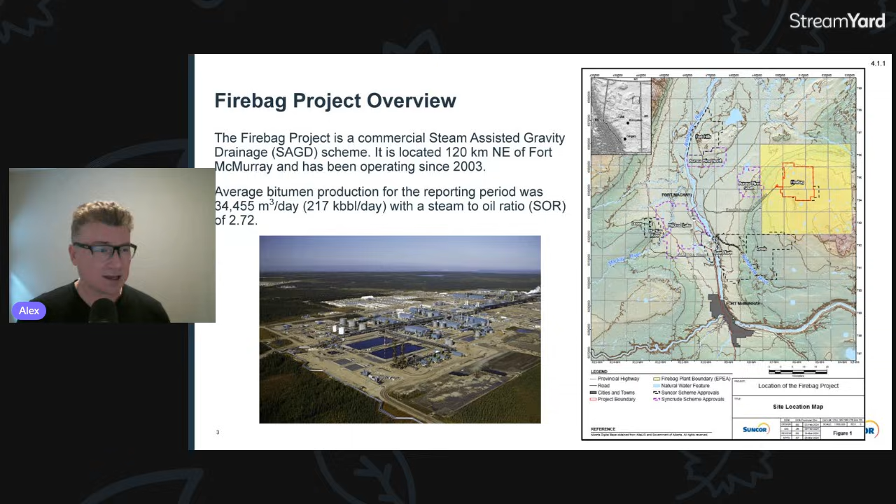Now if you take this aggregated steam injection rate for all the wells and divide by the aggregated oil production rate, which is 244,000 barrels per day, you get the SOR metric, which is 2.5. Now, if we go back here, they indicated that their SOR, steam to oil ratio, is 2.7. So how come we produce more now and SOR is actually going down?

Well, that speaks about the operational strategy and the really good ways in which Suncor is able to bring their assets online, bring their pads online, bring the NCG co-injection online, and really utilize the technology to lower the emissions, to reduce the steam requirement to produce 1 barrel of oil, and really lower that energy intensity and enthalpy required.

Now, for my calculations here, I don't see as much infill integration program. An infill well will sit between 2 well pairs, so injector and producer, and you will have an infill in the middle. In my view, this is an opportunity for them to utilize infill well integration in the future.

As we look historically, we quickly realize that their SOR is declining, the well count is stabilizing or increasing, and they do much more with steam than they were able to do prior to that, which tells me they're very good at optimizing their assets and advancing new methods to control their wells when it comes to subsurface.

Now, from a historic point of view, if you look at the SOR, it's been declining since 2004, but that makes sense because once you start circulating the initial wells and allocating and closing that material balance, the SOR will initially maybe pick up, which is what we're seeing around 2011. But then they were able to integrate technology, and the cumulative SOR is actually declining. So it's closer to that 2.5 mark right now as we speak. In this chart, it's closer to 3.

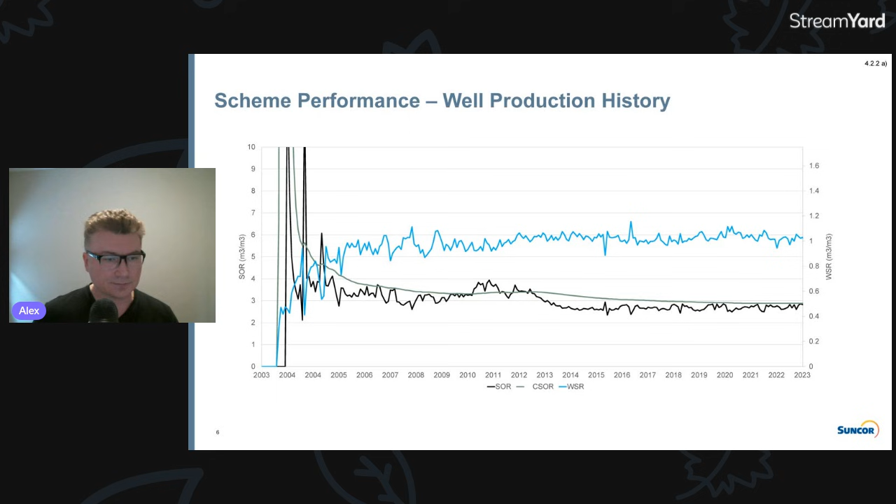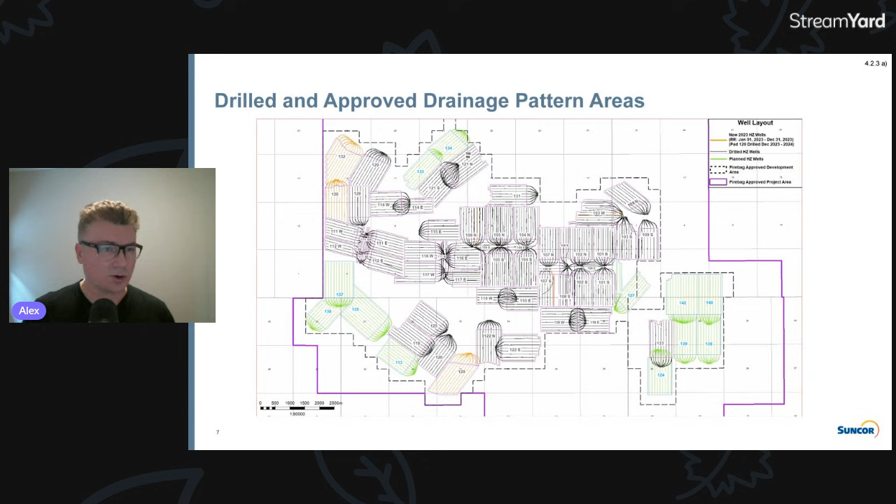So now, as we look into their drilling in the approved drainage area, we can see the cluster of the pads where they're operating, and we can see some areas that were approved and the drilling opportunities as they integrate, bring new wells online, and NCG co-inject the legacy wells to maintain bottom hole pressure for coalescence.

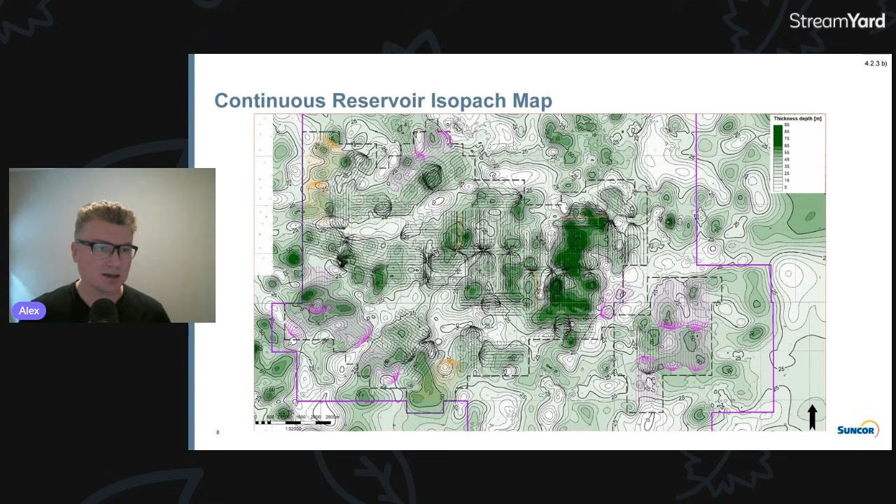Here we can see a reservoir isopach map. You can see the thickness of the reservoirs where they're located, and you will see a lot of legacy pad integration, because what these companies typically do is go into the cleaner zones and exploit those assets. And now you can see them going more west to the areas where the isopach, the thickness, is higher, to develop those wells and maintain that low steam to oil ratio.

This is a continuous reservoir structure map. You can see the elevation depth. So they initially go to shallower reservoirs. As you go west, you go a little bit more into depth, but east you get even deeper, 340 meters. That really speaks to the opportunity in the future to start accounting for what deeper drilling would cost, and what that incremental geology looks like as they get lower. But that explains a lot about why this team was able to concentrate initially on that area.

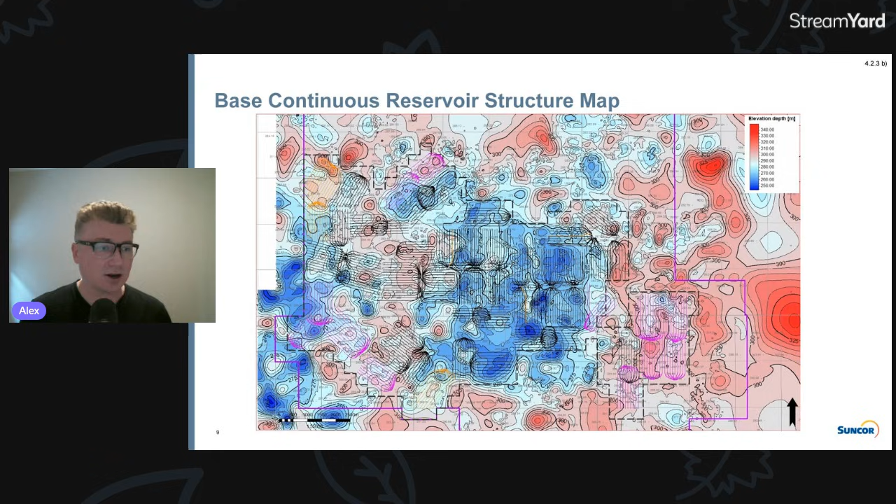This is reservoir zone gas isopachs. You don't really want to have top gas or bottom water or top water going into the reservoir, because once you start injecting steam and the steam chamber is expanding and growing, you can connect to different complex geologies, and that gas could start short-circuiting and going into the producer.

And what we see here, we do see some pockets here and there of different thicknesses of gas, but we can see how the team was able, initially from the legacy pads, to entirely avoid those areas. But then we can see slight pockets of gas, which could be explained by higher gas to oil ratios when you get the production from those areas.

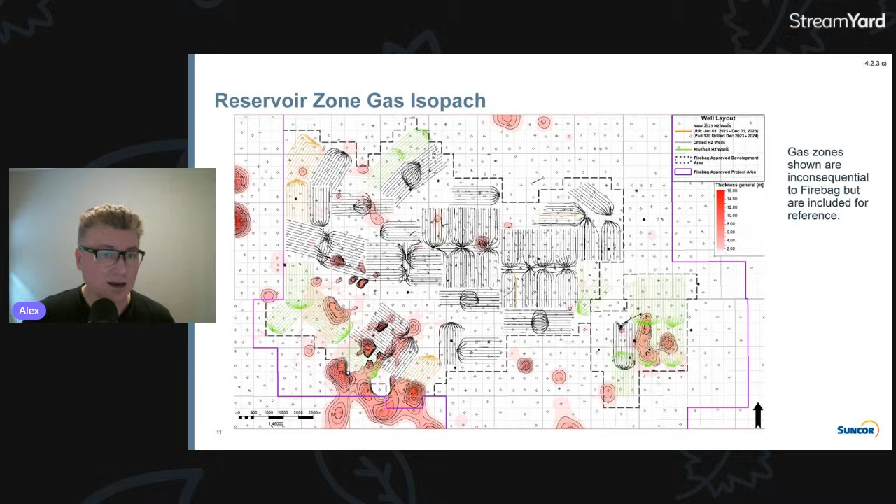And if you look a little bit more south, you can see the big pocket of gas that's located there. That's really unrelated to non-condensable gases, but with that initial gas, you really want to make sure you control your subcool and better mitigate these areas to avoid any concerns in operational strategy. So gas zones are inconsequential to Firebag, but are included for reference, as you can see in this chart.

Water and lean zones: as I mentioned earlier, and mainly because of the data, no top or bottom water zones have been identified within the Firebag development area.

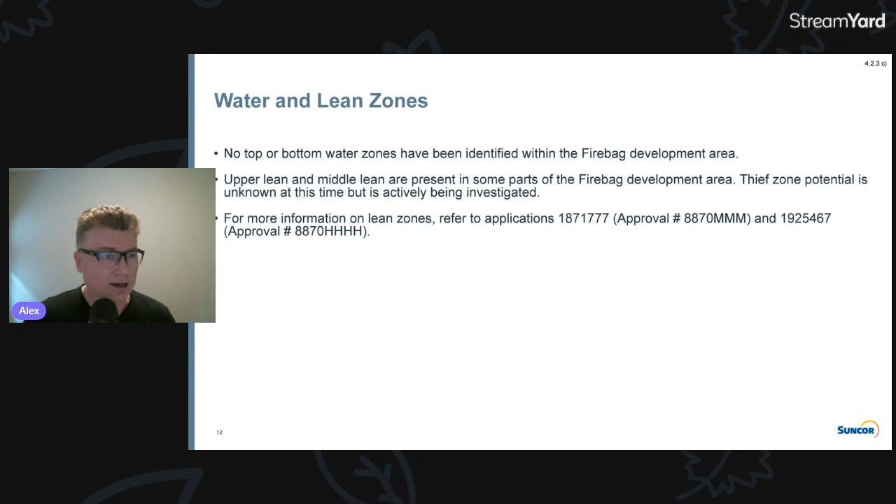We can see that in the data as well. Upper lean and middle lean are present in some parts of Firebag development area. We also talked about that a little bit. And there's more information in there, there are some documents that are applied for.

Now, if we look for geomechanical anomalies, there are no geomechanical anomalies within the Firebag development area. Heave monitoring is performed using interferometric synthetic aperture radar, InSAR. So the idea here is really to see if the ground is moving, and they're basically monitoring for that. So that's basically what they're telling us.

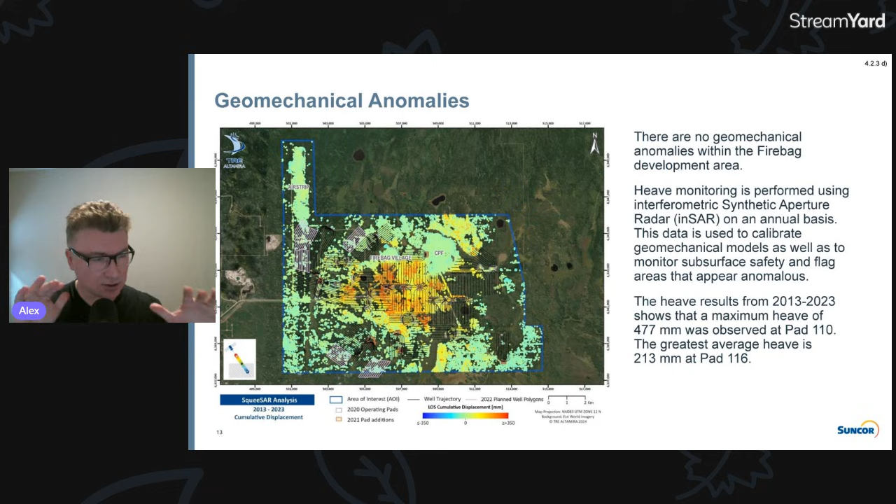This data is used to calibrate geomechanical models as well as to monitor subsurface safety and flag areas that appear abnormal, essentially. So good job by the team here, kind of monitoring the asset to see if things are shifting at surface, and seems like they're doing a good job.

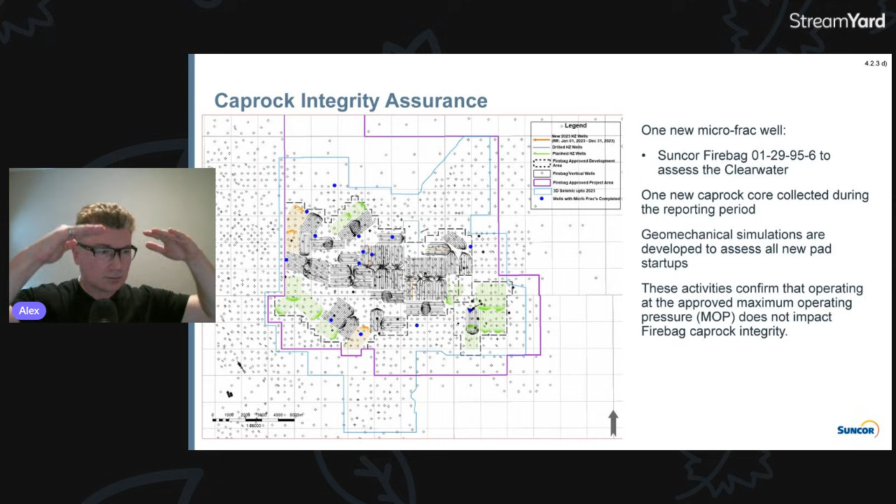Caprock integrity assurance, again, this is a very regulated industry. You have to really make sure that you kind of control your bottom hole pressure and you don't exceed the pressure when it comes to caprock integrity.

And so they have one new micro frac well, Suncor Firebag, to assess the Clearwater, one new caprock core collected during the reporting period, and geomechanical simulations are developed to assess all new pad startups. And so they basically do reservoir simulations to plan a new pad integration.

And here they're basically telling us that they have a geomechanical model and simulations they conduct to account for geomechanics. And this activity confirmed that operating at the approved maximum operating pressure, which is called MOP, does not impact Firebag caprock integrity. So that's really good. You really want to avoid any situations where you exceed that bottom hole pressure.

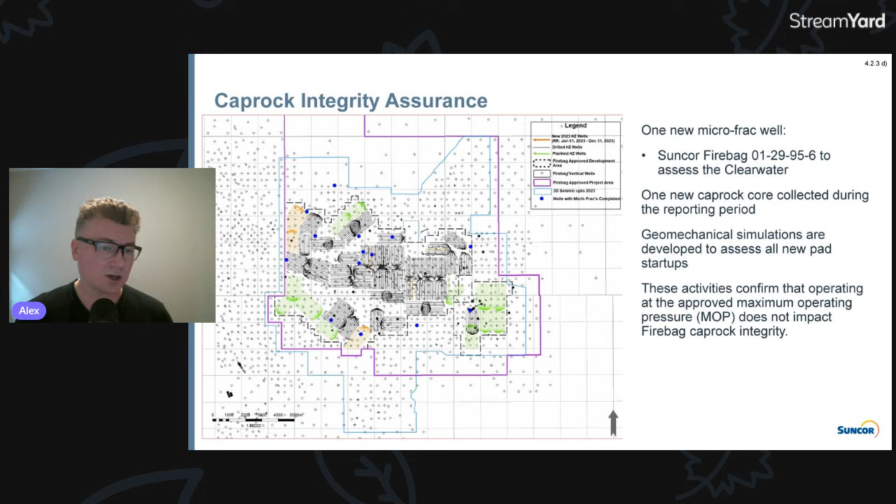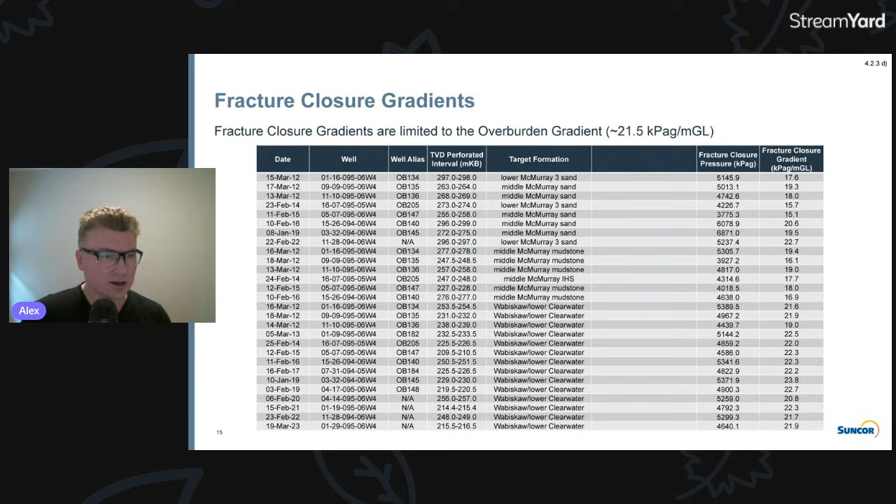Fracture closure gradients. So you have different fracture closure pressures. So I guess some terminology they're using here, and they use target formation. So they talk about McMurray, Wabiskaw, lower Clearwater. So basically different pays, and they monitor those as well.

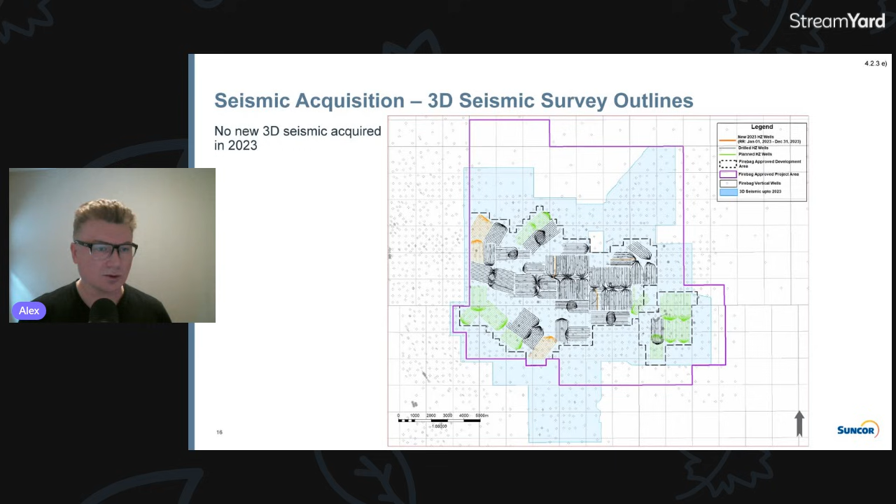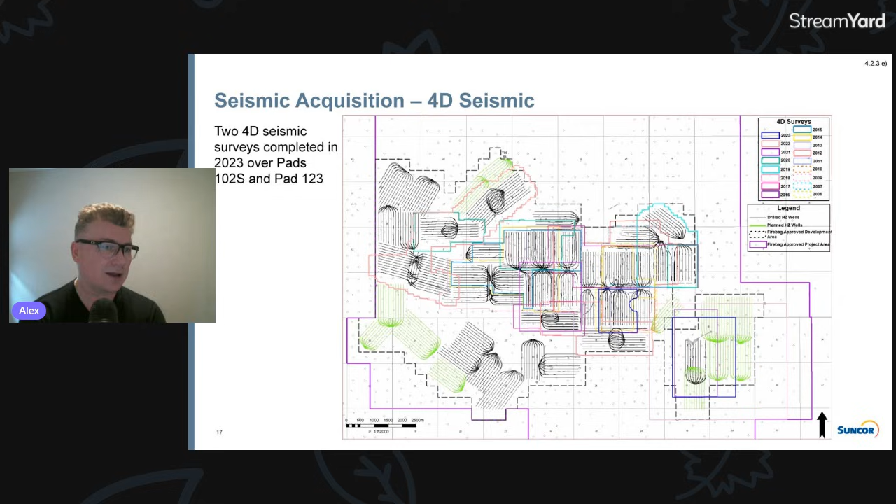Seismic acquisition, 4D seismic is seen here in the picture. Again, they're trying to better understand from a technical point of view how to exploit the asset, how the asset is developing when it comes to drainage. They have two 4D seismic surveys completed in 2023 over the pads and in the local areas, pad 123 and 102S.

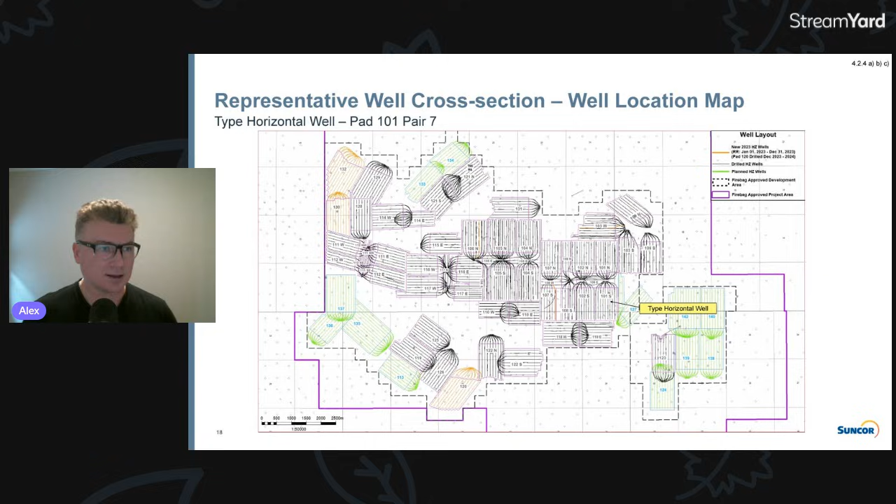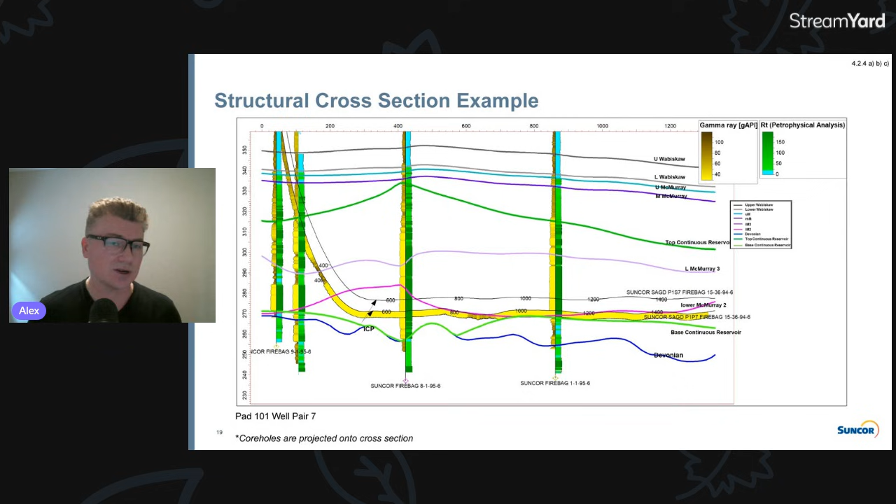You can see the elevation readings here, between, I guess, that well at 270 and the top continuous reservoir, CSI, at 310. So that tells us that those reservoirs could be 30 to 40 meters in thickness.

So exploitable bitumen-in-place methodology, how do they know what's EBIP, exploitable bitumen-in-place? It's defined in each well by the top and base of the continuous reservoirs. You can see the McMurray formation and the exploitable bitumen-in-place reading. You can see the base and the top section. And based on those readings, you get maybe 320 meters and 270, if I'm not mistaken. So again, 40, 50 meters here.

So basically it's defined in each well by the top and base of the continuous reservoir, and it's selected at the base of the continuous sand unit, either developed or most likely to be developed. So continuous reservoir base, lowest portion of the continuous reservoir sandstone with bulk mass fraction cutoff at 6%. So they have a range, and they're looking at mud breccia in the lower portion, and they do cutoffs of what's recoverable.

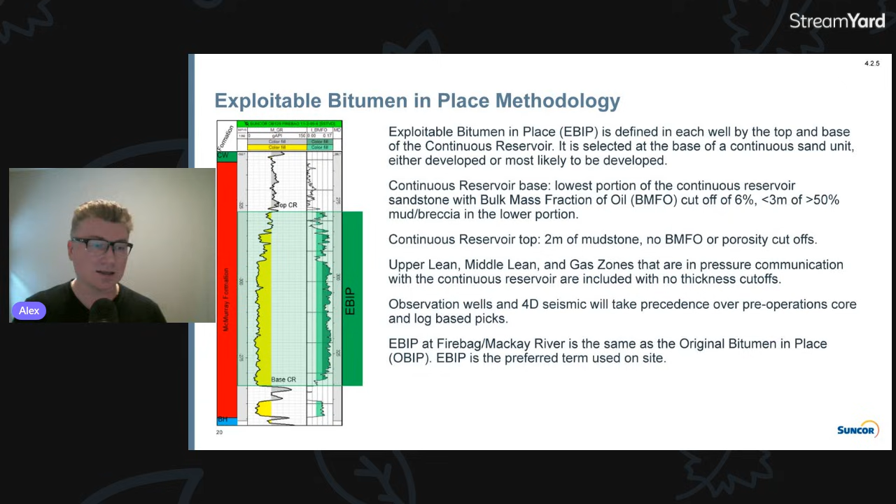Upper lean, middle lean, and gas zones that are in pressure communication with the continuous reservoir are included, with no thickness cutoff. So some information here about how they calculate the exploitable bitumen-in-place methodology, and basically able to say what's the original bitumen-in-place and how much bitumen you get, like recovery factors, and what could be derived from that. And again, sometimes people will say, well, this asset will have that much resource. This asset could have another number of resource, but sometimes it's up to geoscientists on how to calculate that and based on their assumptions.

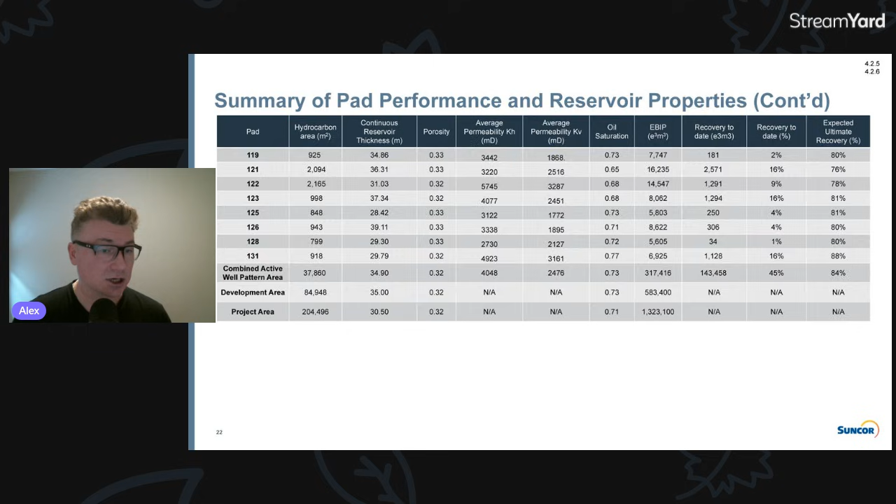We should expect pad 110 to see NCG co-injection in the future, in the next update in the next couple of years when I do another one of these presentations. And it will be more and more integrated towards that late life program, where newer pads will be seeing the steam that comes from that pad, basically reallocating it.

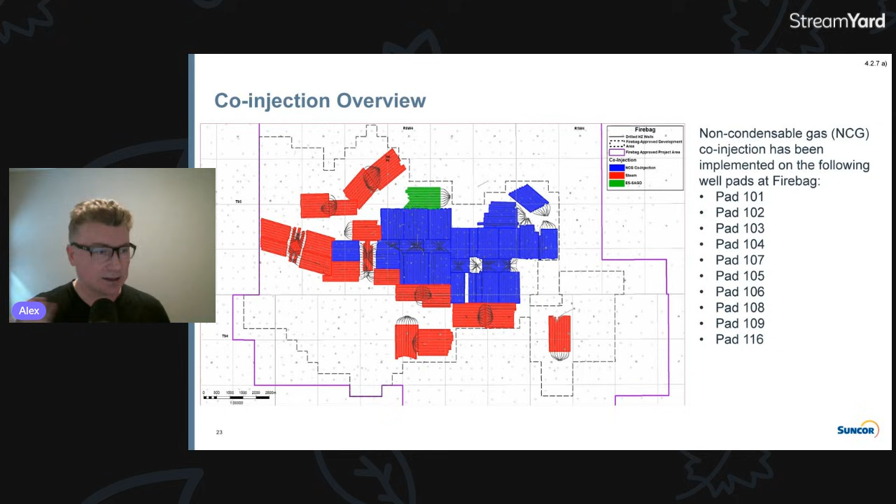And that's how we derive that entire non-decline of the asset, where the production as of today is at 245,000 barrels per day, and it's only increasing towards 250. It's not declining, and that tells you how they're able to allocate that steam from one pad to another as they co-inject NCG.

A little bit more about NCG: geological characteristics, SAGD performance optimization approaches and surface infrastructure are also considered when evaluating timelines for NCG co-injection. That tells us that once they see complex geology, where the SOR is increasing significantly from the baseline SOR, they have to do NCG co-injection, because that indicates inefficient utilization of steam. Some of the main factors considered to determine, execute, and monitor NCG co-injection rates involved monitoring reservoir responses and key performance indicators. And as I mentioned, one of those is probably SORs, right?

Steam to oil ratios. Field-wide strategies to cut steam from mature pads and replace with NCG, and that's exactly what I talked about. Maintain the desired chamber pressure for the mature pads. Once you get coalescence between the steam chambers, if you inject a lot of steam in one pad and drop pressure on a neighboring pad, that steam could be going to places you don't intend it to go. Therefore, you have to co-inject NCG to maintain a balance between the bottom hole pressures in situ.

NCG retention within the reservoir, considering the balance between NCG leakoff and volume of NCG produced back. So they're really controlling the material balance when it comes to NCG co-injection. And sulfur recovery unit capacity limit to handle the level of produced gas at the field level. Like any other asset, they will be constrained by a certain surface facility volume, in this case sulfur recovery unit capacity to handle the produced gas at the entire field level.

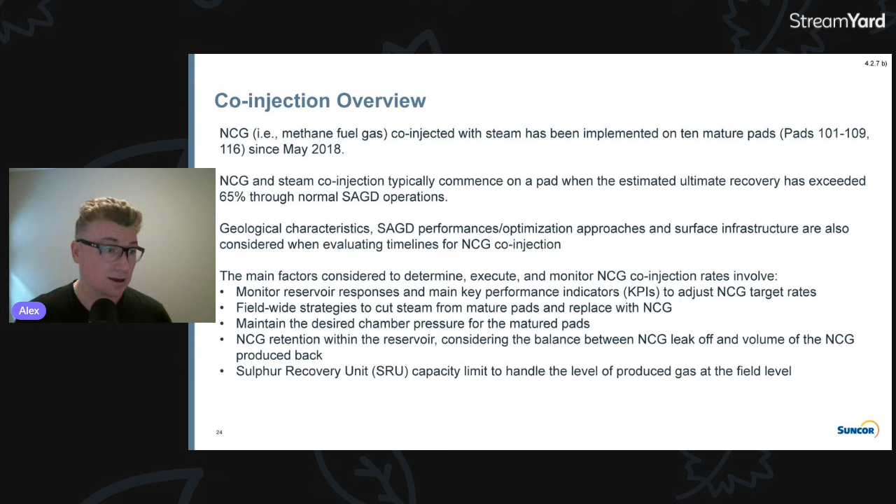As we look at co-injection impact from some of the pads, you can see NCG co-injection performance at pads 101 to 109, 116. We can see the well production trickling down, and that's expected, because the incremental steam utilization doesn't provide the same benefit, and therefore SOR must increase. But because they co-inject NCG, they're able to drop steam from 60,000 cubes per day towards 30,000, a 50% drop in steam utilization, and drill new pads, new well pairs, and reallocate the steam accordingly.

Therefore, SOR is maintained at very good levels, between 2.2 and 2, and average chamber pressure is also maintained. So that tells us that one of the KPIs is to maintain the bottom hole pressure and the chamber pressure between 2,000 to 2,500 kPa.

There has been no observation of negative impacts on oil rate after NCG co-injection other than due to natural decline. And again, one could say, well, the oil rate is declining. Of course it will decline, because now you're on the lateral expansion of the steam chambers, not vertical expansion. So oil rate is no longer growing, it has to trickle down.

But on the overall asset, because you reallocated that steam, you're able to maintain an overall asset non-declining oil rate, even though on a per-well basis you will decline or trickle down. Continuous reduction of steam injection rates, as we can see in the charts to the right.

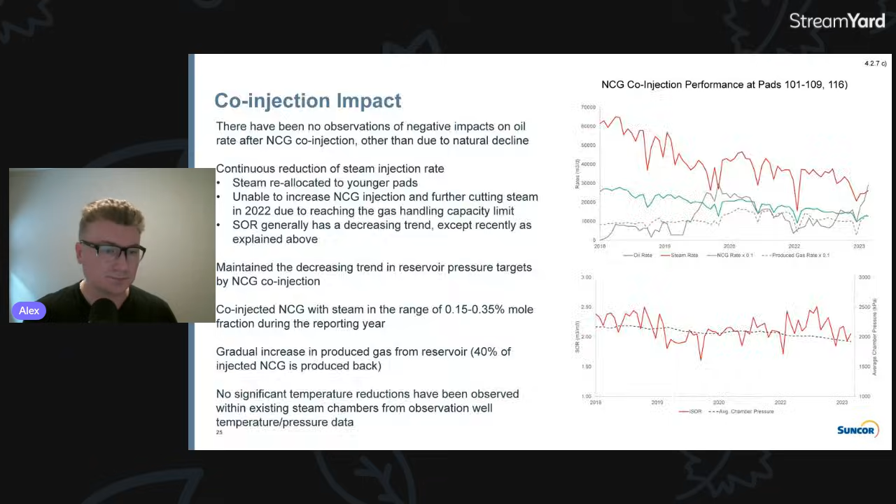So let's talk a little bit about surface facilities. So here you can see an overview of built and planned surface infrastructure. There have been no modifications to the CPF, so central processing facilities, during the reported period.

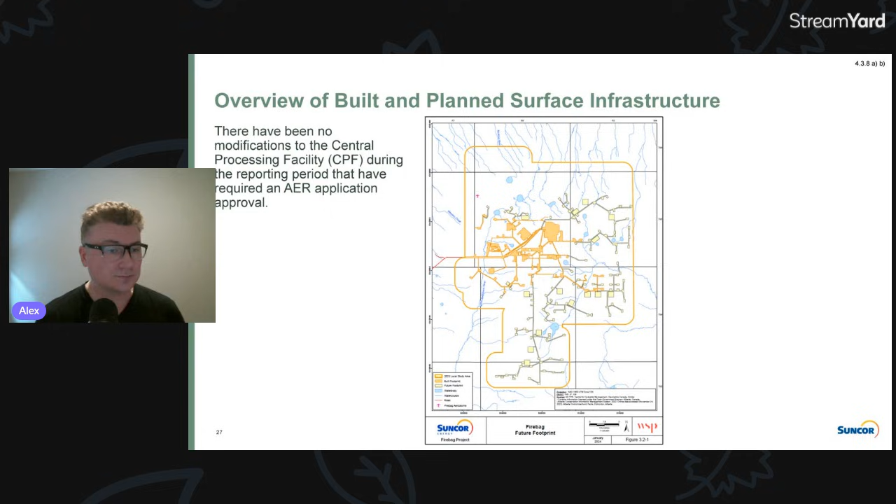Now, what this basically alludes to is that for central process facilities, at the front end you need steam injection capabilities, and if you produce 250,000 barrels per day, at an SOR of 2 you need 500,000 barrels a day of steam. In their case, you need about 620,000 barrels of steam to be generated daily to be injected to the reservoirs to produce that oil. So they're basically saying no major modifications for that period.

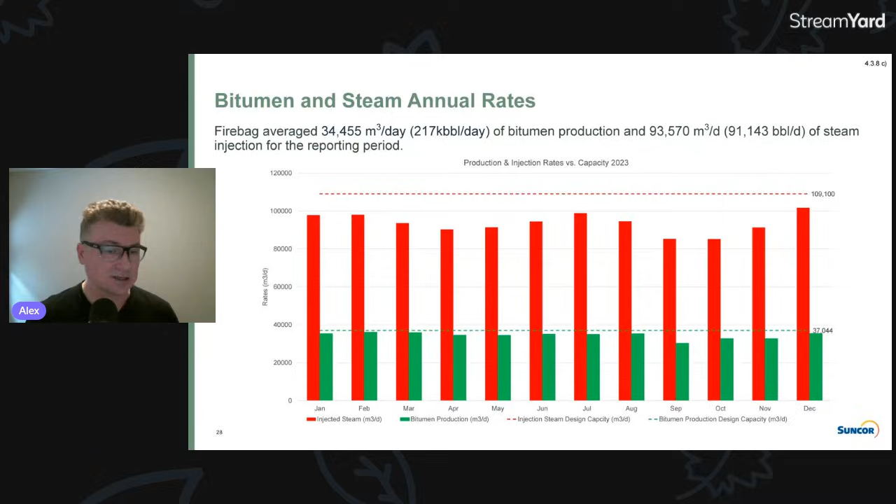And the reality is the legacy well pairs and pads are seeing NCG co-injection. So they're very active and they're trickling oil production rate. So there's no reason to abandon anything here. Everything is pretty much active. Now, as I mentioned, this is not to be confused with conventional operations where, when the well is basically not performing, you abandon it.

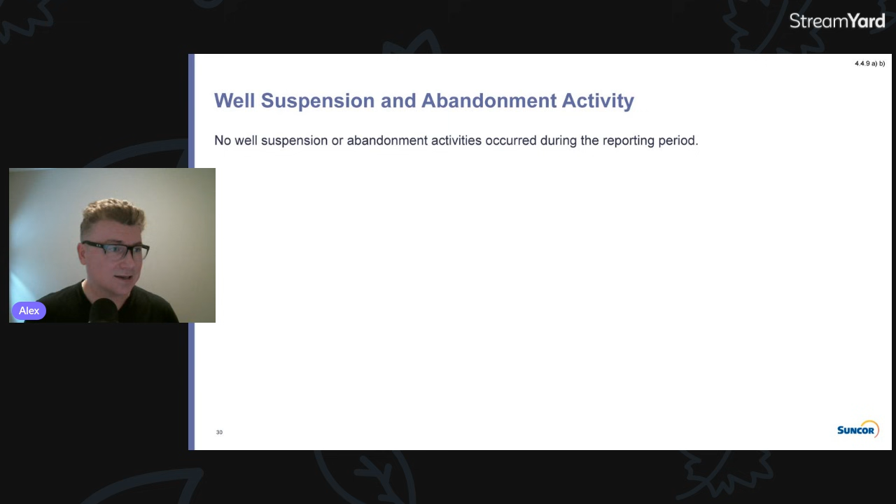But here, as we have a coalescence of the pads, the entire field is basically being managed on the steam to oil ratio metric, and bottom hole pressure is being maintained. There's no suspensions or abandonments, and that's one of the benefits of SAGD operations. So they were also kind enough to share with us regulatory operational changes and key learnings.

They tried different startups at pads 125, 126, so those will be the newer pads with their steam injection. And what they're talking about here is that they tried different circulation methods. Combined circulation and bullheading methods have been applied to new pad startups over the years. When you start the SAGD process, you need to create communication between your injector well and production well.

You will have roughly a 5 meter difference between them, but the bitumen there naturally is like a hockey puck. So you've got to melt it down and create this initial communication. Then from the injector, you can start injecting steam and produce that emulsion as you develop the steam chambers by gravity towards the producer. But you need that initial communication.

So what they're telling us here is that bullheading requires less cumulative steam to achieve the same reservoir heating as circulation. This reduces CSOR, cumulative steam to oil ratio, and emissions produced. Basically they're injecting a significant amount of heat and bullheading into the injector to create that initial communication with the producer. The alternative is circulation of both producer and injector to transfer heat and get closer to 200 degrees to create that communication.

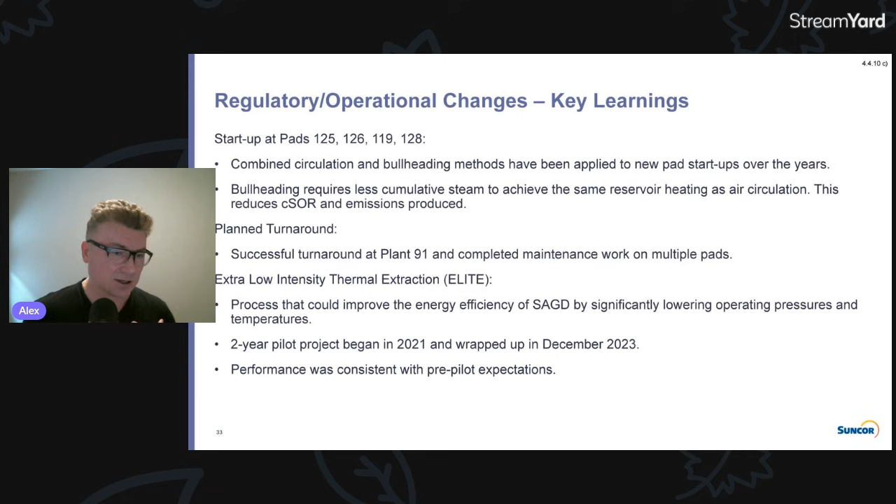Another regulatory operational changes technology update: they're trying something called ES-SAGD. Basically, when you inject steam, you could co-inject condensable gases or liquids with that steam that get vaporized and injected, like solvents. And for pad 131, they do ES-SAGD. Pad 131 was designed as an ES-SAGD commercial demonstration pad, equipped with a dedicated test separator, horizontal and vertical separators, and instrumentation.

They do a comprehensive surveillance program, which started with a SAGD baseline in March 2022 towards January 2023. All 8 well pairs are co-injecting HT MUD, which is basically hydro-treated makeup diluent. This will be like a pentane-hexane molecule, C5-C6 basically. And this is kind of a solvent co-injection process. And target hydrocarbon co-injection concentration is about 10 vol% of that steam injection mixture.

Planned duration of co-injection is 2 years, so end of February 2025. So they should have ended this program in 2025. And oil rate uplift and SOR improvement post-solvent injection was observed in Pad 131. Solvent recovery is expected and monitoring is ongoing. So in my experience, typically those programs take a long time to understand the KPIs, get all the readings, all the measurement programs, and close the material balance. So that's what they're attempting to do here.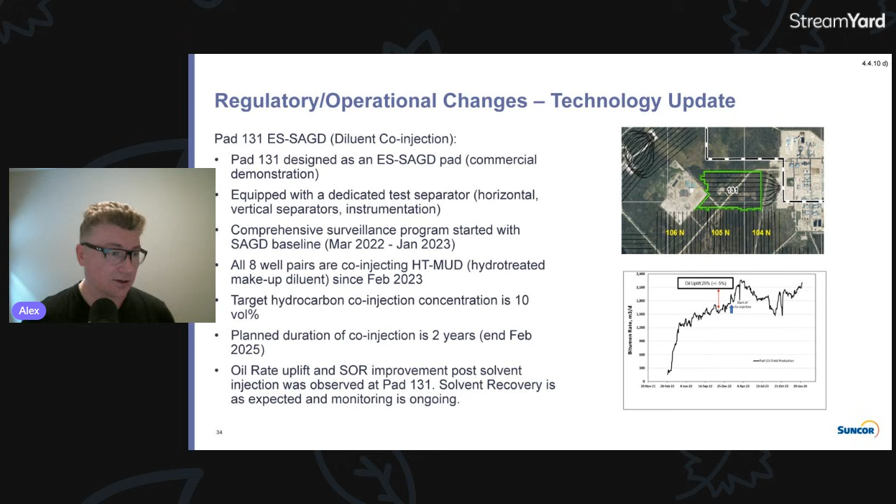And what we see here is basically a small uplift in oil production rate, as they show us in the chart. Bitumen rate increased, but again, this could be a function of operational conditions. So this is something to be mindful of as we go forward, because there could be an incremental cost associated with that solvent co-injection. But let's see what we hear from them in recent updates, and I will be the first one to share it with the community online to make sure we better understand how that hydro-treated makeup diluent is being utilized as part of SAGD co-injection.

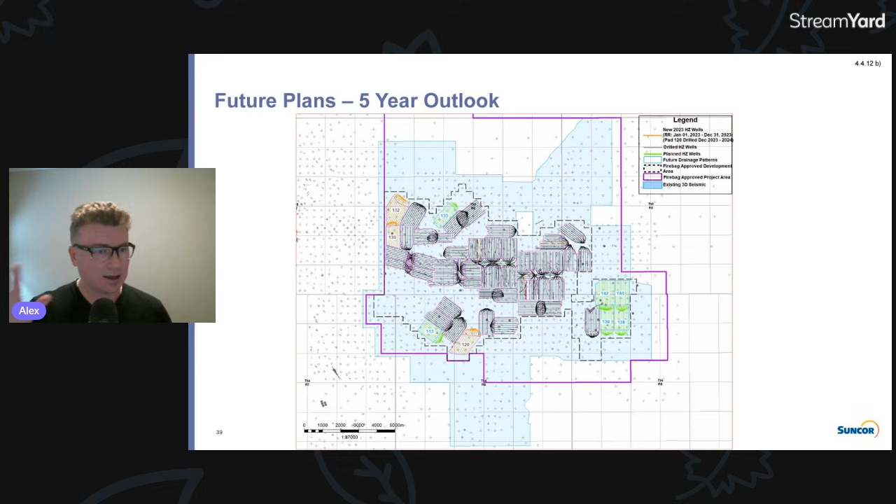This will be one of the final slides. Future plans, 5-year outlook. So you can see their development program going more towards the west, towards those new yellow pads, 132, 136, 126, 120, if I'm not mistaken. So a little bit more south. But you get the idea that they're trying to tackle more nice pay reservoirs, as we showed in previous slides, and really continue the development program as they integrate steam and utilize NCG co-injection in their legacy pads.